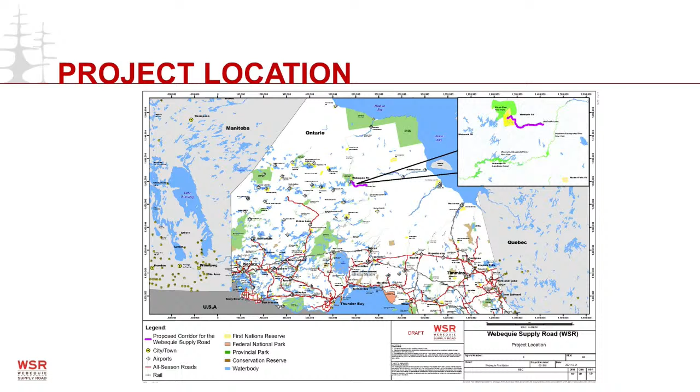Next slide, please. Let's talk a little bit about the purpose of the Webequie Supply Road. I need to remind everyone that Webequie First Nation is actually the proponent of this project. They are the project sponsor, so they are leading this. This is their project. I'm a member of the project team, and we work for Webequie First Nation. So let's get back to the slide here.

The purpose of the supply road is planned to move materials, supplies, and people from the airport in Webequie to the McFaulds Lake area. It's also to provide employment and economic development opportunities in the community, but in doing that, also allow the community members to preserve and enhance their language and culture. That's really, really important.

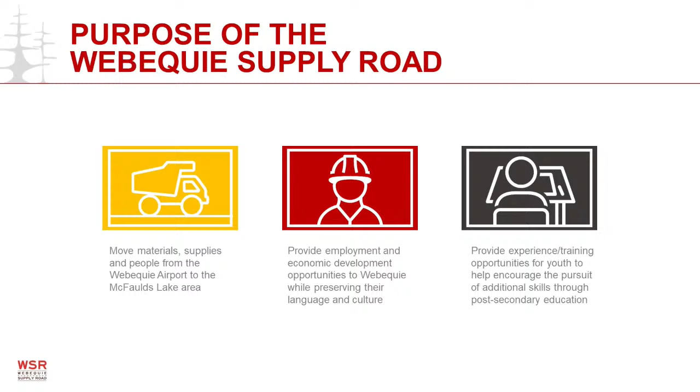And while the project is required to go through both federal and provincial impact and environmental assessment processes, Webequie has their own internal process where they will decide for themselves whether to proceed with the road. So if we can go back to the previous slide. And finally, another purpose for the road is to provide experience and training opportunities for youth, and in doing so, encouraging them to receive training and pick up additional skills through additional post-secondary education. Next slide, please.

So let's provide a bit of a background on the project, the description of the project. The planned road is approximately 107 kilometers long, like I said, running southeast from Webequie's settlement on the island to the mainland, and then it turns east across the James Bay lowlands to the McFaulds Lake area. Now, of that 107 kilometers, 17 of those kilometers sit within the actual reserve boundaries.

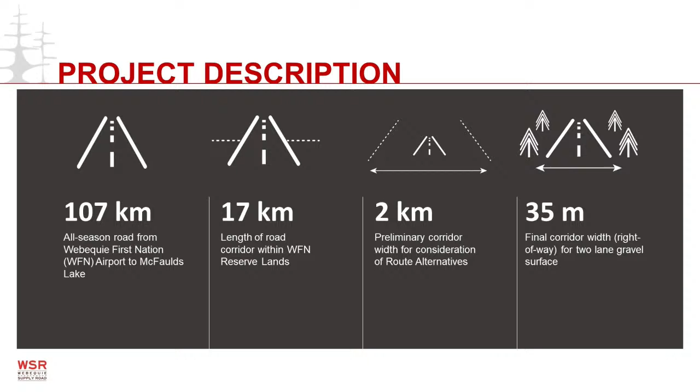And the planned corridor, the preliminary corridor that the project team is working with, is 2 kilometers wide. So the road could sit anywhere within that 2 kilometer wide corridor. So that's where we consider the route alternatives within that 2 kilometer corridor. And then the actual width or right of way of the road, the cleared area for the road, would be 35 meters. Next slide, please.

Continuing on with describing the project, the planned road would have three major water body crossings: the Winisk Lake, which would take the road from the island across to the mainland, across Winisk Lake. Then there would be another crossing southeast of there, Winiskisis Channel. And then there would be the final crossing, major crossing at least, of the Muketei River just west of the end of the road, so just west of the McFaulds Lake area.

And then, as I sort of touched on before, the road is not just a road, it includes other temporary and permanent facilities. So these would include aggregate pits or rock quarry areas that would have equipment for processing rock, and then the access roads to get to these places. It would also have construction camps on a temporary basis during construction to accommodate construction crews,

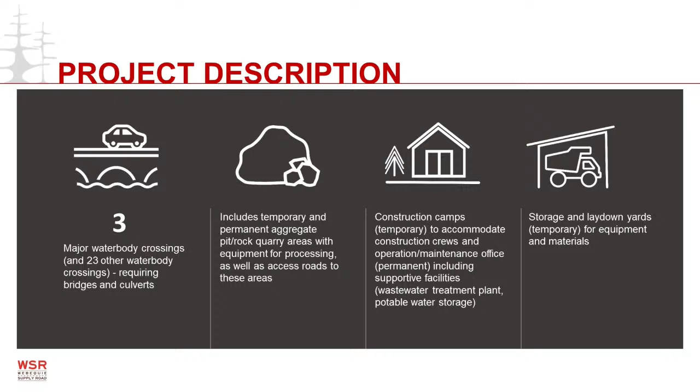and then there would be obviously some operational and maintenance offices associated with the road that would be permanent, but these support the operations of the road, and there might be other supportive facilities on a temporary or permanent basis, such as a small wastewater treatment plant, or a potable water or drinking water storage area. As well, there would be storage and laydown yards on a temporary basis for the storage of equipment and materials.

Next slide, please. So next we're going to talk a little bit about the alternatives assessment process. We can move to the next slide, please. This process, basically in the environmental assessment process, for every what you call undertaking, which would be like a project, there has to be considered a reasonable range of alternatives. And these alternatives include what you call alternatives to and alternative methods. So let's go in and talk a little bit about these because it's important to understand this.

So the alternatives to the proposed undertaking or project are what you call functionally different ways of approaching or dealing with the problem or opportunity. And I'm going to get into an example of that in a minute. Alternative methods are different ways of carrying out the proposed undertaking or doing the same activity. So let's start with the alternatives to. Next slide, please.

And hopefully this will explain things for everyone. So alternatives to, different ways of doing this. So instead of a road, you could have perhaps a railway. And I know it may sound a little crazy, but perhaps you could have a cargo airship move materials from Webequie to the Ring of Fire area. That's a possibility. Perhaps you could use a hovercraft. So that's another possibility. You could have a railway as well too.

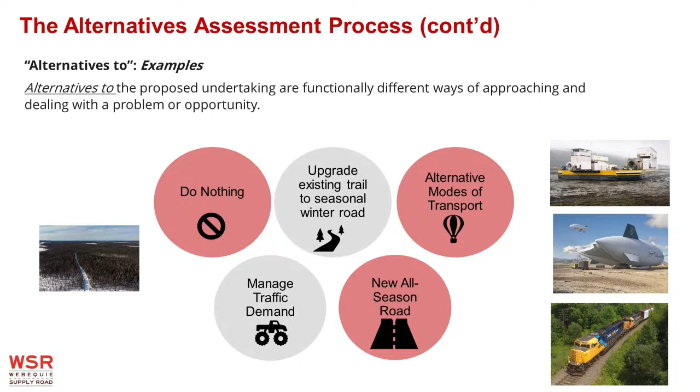So let's move now to talk about alternative methods. Next slide, please. There we go. So when we talk about alternative methods of carrying out the undertaking or the project, these are different ways of doing the same activity. So, okay, if we're doing an all-season road, these could be different routes. What would be the different things if you have an all-season road? It would be the path that the road follows, the route.

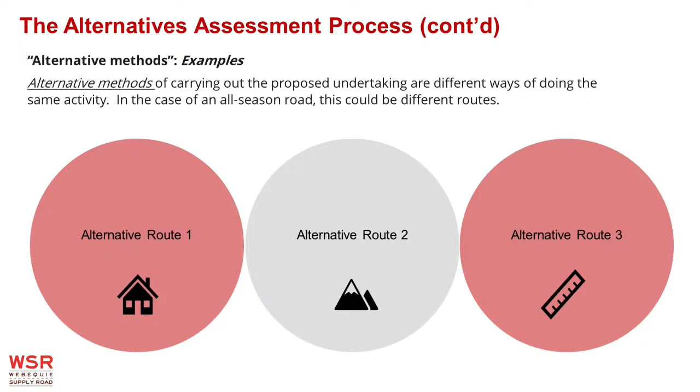So you could have different routes based on different factors. So maybe if you had an engineering factor, the road might be different from what the community exactly wanted. So there's a lot of different factors involved in that, and we'll get into that with time as well. So let's move now to talk about and introduce some of the upcoming radio show and live stream topics on the next slide, please.

So over the next probably 10 or so weeks, on a bi-weekly basis, we will be talking about different topics, the ones I mentioned at the beginning.

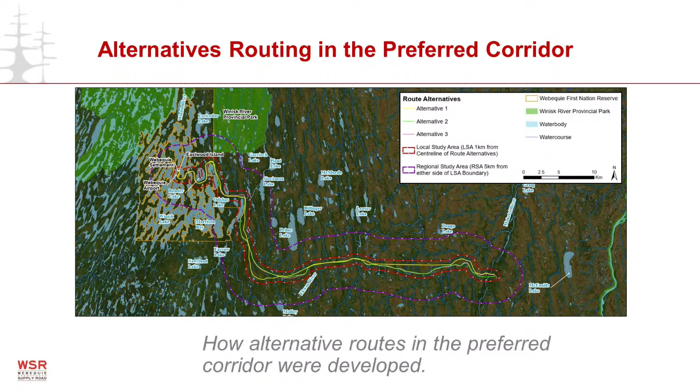So if we can go back to that slide, please, the previous one. So that's what I'm talking about here. So you have these different alternatives, road alternatives within the corridor of 2 kilometers based on different things, different factors. Next slide, please.

So then we talk about the evaluation of alternative road corridors. So what's involved in looking at the alternative? What things do we think about when we're looking at the alternative road corridors? We would look at things like maybe vegetation, fish and fish habitat, use by community members, particularly significant areas that are considered special by community members that we should avoid. We could look at other factors in terms of, like I talked about, constructability of the road in a particular corridor, cost, there's many, many, many issues. Next slide, please.

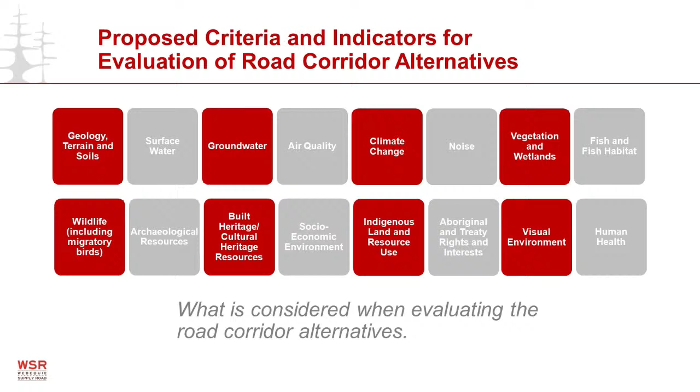Again, another less obvious one like noise, and then human health, right? We have to, as part of doing the environmental assessment or the impact assessment, establish that baseline. Environmental baseline, human health baseline is only one of those components, but it's important to paint that picture so that people understand the way things are right now. That gives us a way to identify potential impacts during construction, after construction, because we have a baseline, we have those existing conditions defined. Next slide, please.

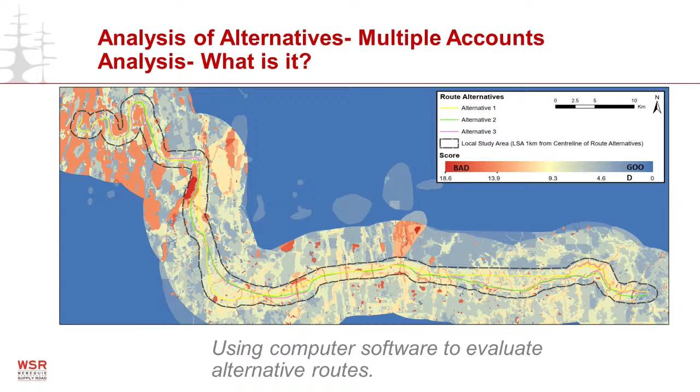So another interesting discussion that we're going to have is the analysis of the alternatives using multiple accounts analysis. This sounds very complicated, and it is to a degree, but hopefully we'll be able to break it down and make it easier to understand. But the best way to describe it is working with different map layers, where each map layer would represent something, for example, that would be important to community members, whether it's vegetation or many other factors. These would all be different layers of information that are overlaid, and you can weigh layers so that they're considered more important perhaps than other layers based on input from community members and the general public.

And so by doing this, you create sort of this, the way to describe it is a surface, right? So you take all these layers, you combine them together, and you're doing a scoring.

You're doing a scoring to sort of evaluate areas, very small geographic areas, and identify where sensitivities might be and the degree of sensitivity of the area through which the road might go. And then that way, it allows you to compare one route with another route.

It's very detailed. It can get quite complicated, but the important thing to remember is it makes it clear for everyone. It allows everyone to provide their input and opinion as to how important certain factors are, and it gives you a pretty good picture of the route of least impact, that goes through the least sensitive areas. So we'll talk a bit about that.

It's really interesting stuff. I think it's something that community members need to understand, because it's a way to take all of that information that's collected, combine it together, and really come up with a solid, sort of defensible reason for a particular route for the road. Next slide, please.

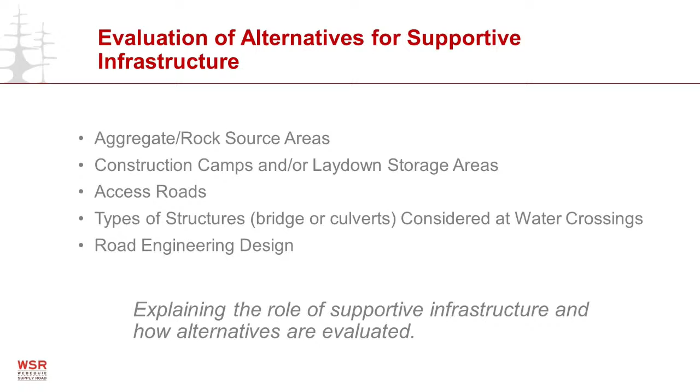And I'll get into that on our next slide a little bit, actually, Nick, because one of our topics is proposed criteria and indicators for evaluation of alternatives for supporting infrastructure. So, of course, I talked about the valued components when I was reading off those many different factors that might be considered in evaluating route alternatives for the road, but the same thing goes for supporting infrastructure,

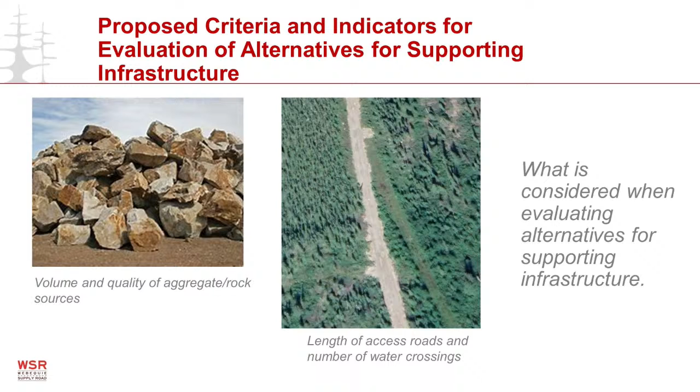except there's slightly different considerations, because you need to find out where the rock is available or the gravel is available, and then you have to come up with estimates as to the potential size of the deposits, because that'll give you an idea of how many facilities, quarries, pits are necessary in order to build the road and then maintain the road as well. And I talked a bit about this before as well, the length of access roads and the number of water crossings that those access roads make. So there's a lot of stuff to talk about over the next few weeks.